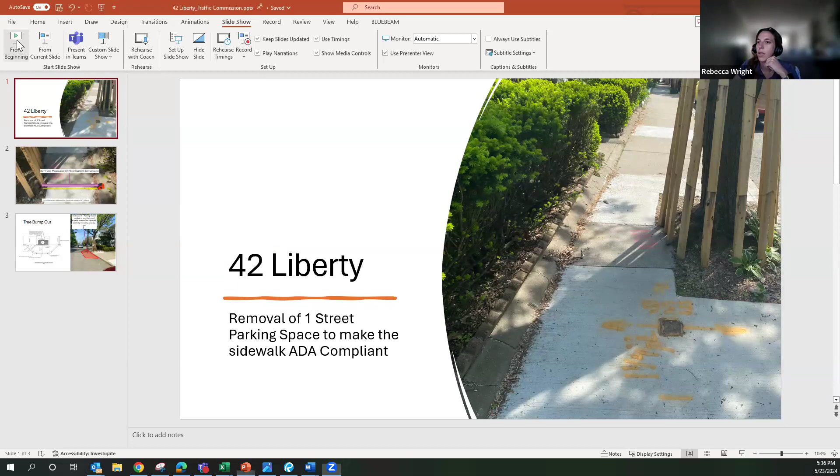Is it okay if I share my screen? I did put some slides together. Okay, can you guys see my presentation? All right, cool. I've never really done it on this, it's been a while.

So the area in question is 42 Liberty, removing one parking space to make the sidewalk ADA compliant. This is a field measurement. As you can see, it is 30 inches from the tree trunk to presumably the back of sidewalk property line. We need minimum 36 inches to make the sidewalk compliant for ADA.

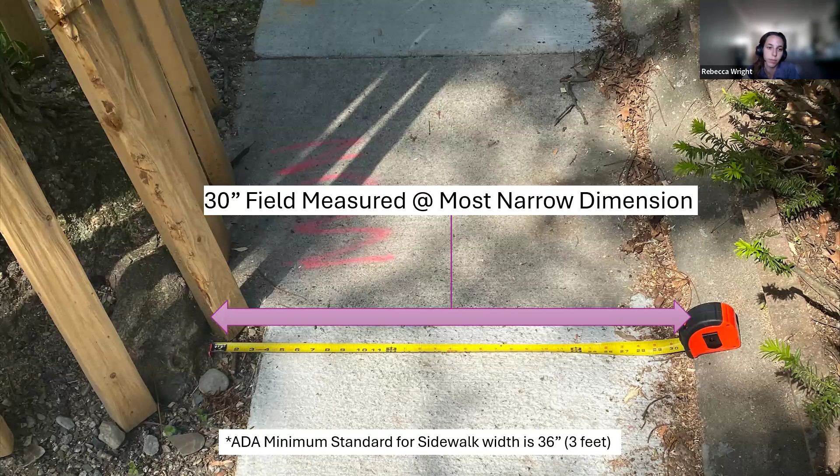And normally we replace flexi pave, but even with that, the trunk is way too high to get that extra 6 inches that we need. So the proposition is, in order to save the tree and make the area compliant, to install a sidewalk bump out. So it's new curbing and concrete, about 4 feet or 5.5 feet, which will take away 1 parking space to accommodate this request.

And that's the last of my slide. I'm not sure if anyone has any questions. I have a question. So if this gets approved and moves forward, just want to make sure that everyone's going to be on the same page about protecting the tree roots.

During construction. Yes. Yeah, so we are intentionally leaving the granite curbing in front of the actual tree in place and removing the adjacent curbing, which is normal construction procedure with this contract. So the curb directly in front of the tree pit will remain in place.

So it's very clear to the contractors that as they're working with this curb, leaving it in front, but working on the other side of the tree, that they'll be either hand digging that curb, correct? Yeah, we have air spading in this contract, and they will either do that or use their regular equipment and be careful around any roots.

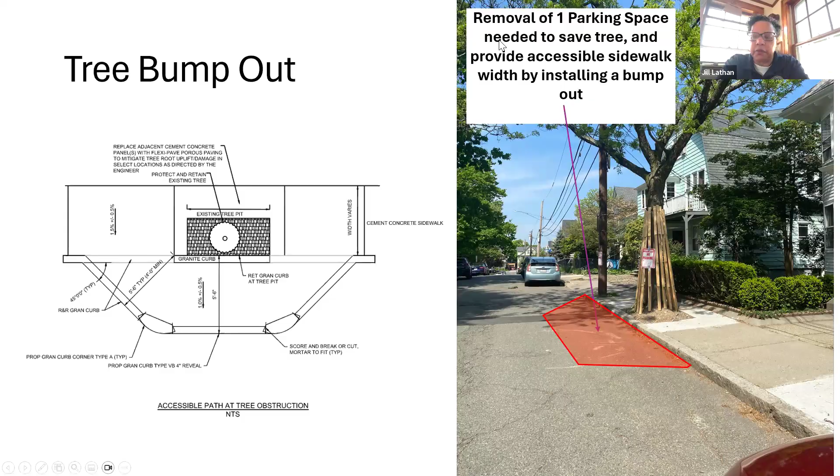Wonderful. On to item number 4. Regarding the curb on the north side of Somerville Ave from 115 feet to 150 feet west of Breach Street, nearest 577 Somerville Ave: request to convert 35 feet of 2-hour parking except by permit to a loading zone at all times.

Who is here to discuss this item? Good evening, Chair. My name is Adam Polinski from the city's mobility division, and I can represent this item. I will also share my screen if that's all right.

The location in question is 577 Somerville Ave. The current business tenant in that building, Vittoria Meat Market, came to the city and requested the creation of a loading zone to better suit their operations. This was reviewed in the field against other existing regulations in the area, against things like driveway locations, and how much room we had between mobility and parking.

We determined that this was a reasonable request, that the appropriate regulation was to take the 2-hour parking that's currently out there and make it a full-time loading zone, and proceed with taking the 35-foot section of curb here in front of this building as they requested, and changing the regulation.

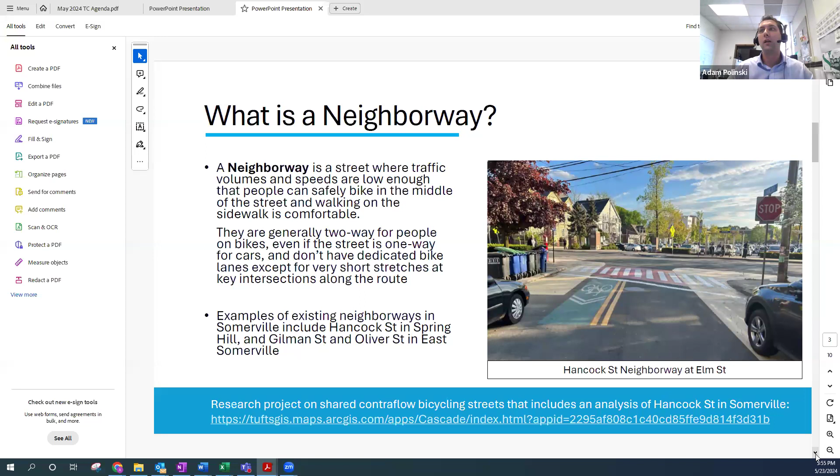So with that as the preamble, I'll get into the various items that we have discussed or that are on the agenda for today. So we will start over on Otis Street. This is Otis Street at McGrath Highway.

The item is for an additional 10 feet of no parking beyond our standard 20-foot parking regulation that already exists within 20 feet of all crosswalks or intersections within the city, extending that by an additional 10 feet of no parking so that we can produce the design as you see it on the right.

So this would be a similar treatment to what I was showing on Hancock, where you have a little entryway for a bike, a car has enough room to get around here, and once traffic has cleared, the bike can continue if there happens to be a car coming. If not, they can use this and take up the street. There will be opportunities throughout these streets for people to pull over, because we tend to have so many driveways in Somerville that there's a negotiation that happens. But in order to produce this important gateway treatment here, we are requesting the removal of 10 feet of residential permit parking.

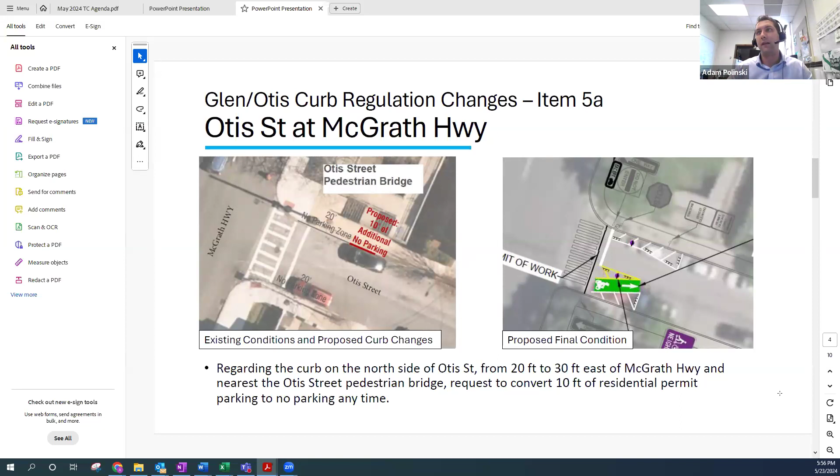It's going to be a similar story as we work our way down Otis. This is at Cross Street. The existing condition is shown here on the left. In addition to the standard 20-foot no parking zone that exists in our regulations citywide, we're requesting an additional 20 feet of no parking on the south side of Otis that is currently residential permit parking. Pending approval, this would be the final design in this section. Since Otis is one-way westbound, bikes would have a dedicated lane for about 40 feet coming into the intersection, and cars would be coming from Cross Street at all times.

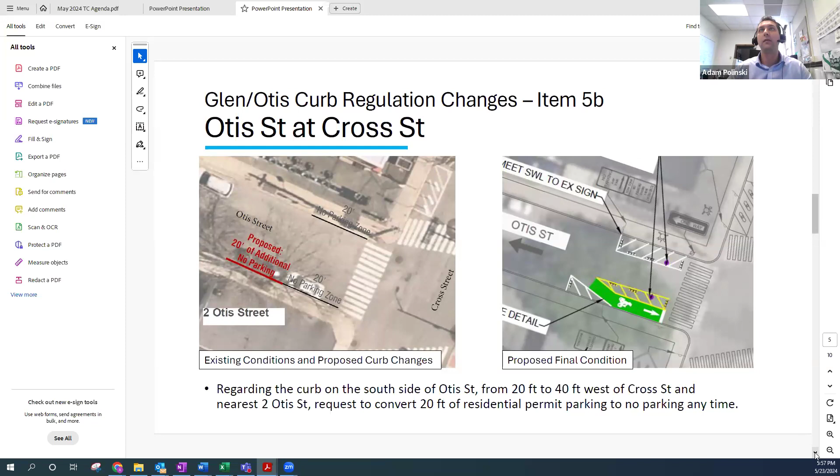We now move to Glen. This is Glen Street, going up and down on your screen, and that's Broadway going left to right at the top of the page.

The request here is for an additional... Can you just reference the letter when you're going to the next item, since they're labeled A, B? Yes, so we discussed A and B on Otis. We're now on item 5C. Would it be helpful for me to read out the full request, or just mention the name? No, just identify the item. 5C. Sounds good.

So 5C, this is at the top of Glen Street, the northernmost section of Glen. There is some metered parking here, so we would be requesting the removal of this meter to provide our exit treatment for someone contraflow coming out of Glen Street.

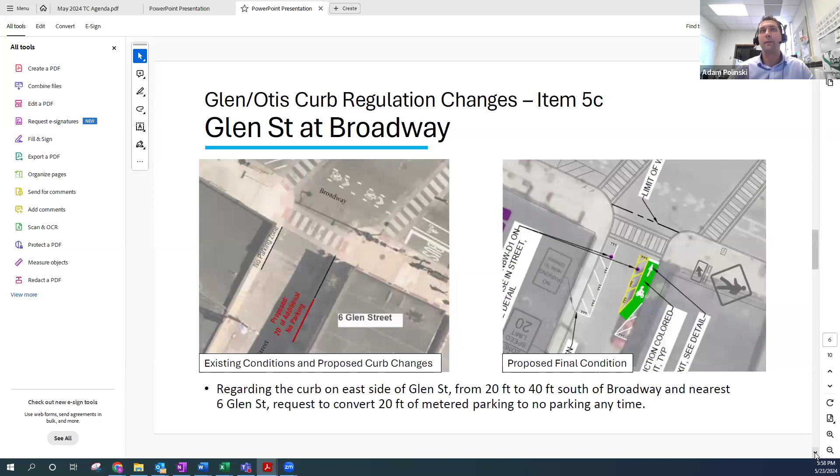Now we work all the way down to Pearl Street. The request here is, in addition to our 20-foot standard no parking zones, for 10 feet of no parking on the northeast corner of Glen here, and then an additional 10 feet on the northwest corner, and then the southeast corner on this side of Glen at Pearl. You can see the final design proposal here.

Those are items 5D and 5E, sorry.

Okay, moving on to 5F and 5G. Those both correspond to the Glen Street at Oliver Street intersection. The request is to take the existing residential permit parking on the northwest side of Glen, north of Oliver, to be able to provide the contraflow bike lane there. On the southeast side, this is 10 feet of what is currently a pickup and drop-off area during school hours, and residential permit parking at all other times. This does only amount to about half a space and is often used flexibly, so it's not really even a full parking space in that case. The idea is that we will then be able to provide some additional space for the treatments on Glen at Oliver.

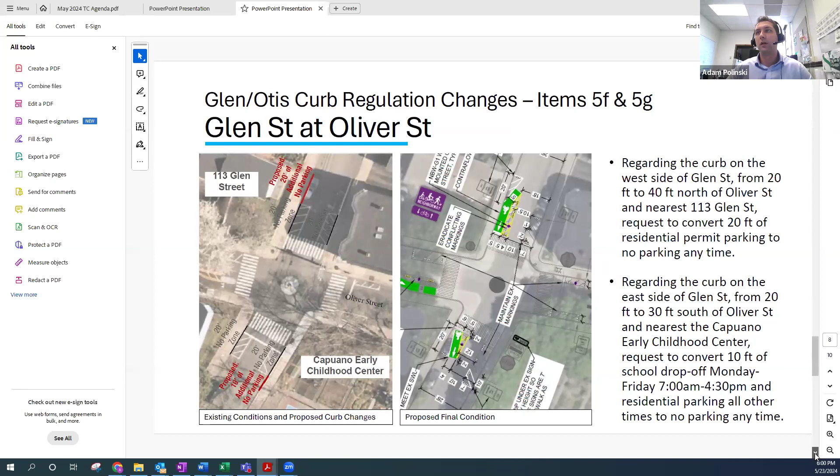And then the last curb regulation, item 5H, is at Glen and Tufts, all the way at the southern end of Glen. That request is for an additional 20 feet of no parking on top of the standard 20-foot no parking zone, so that we can produce a bike exit lane onto Tufts Street.

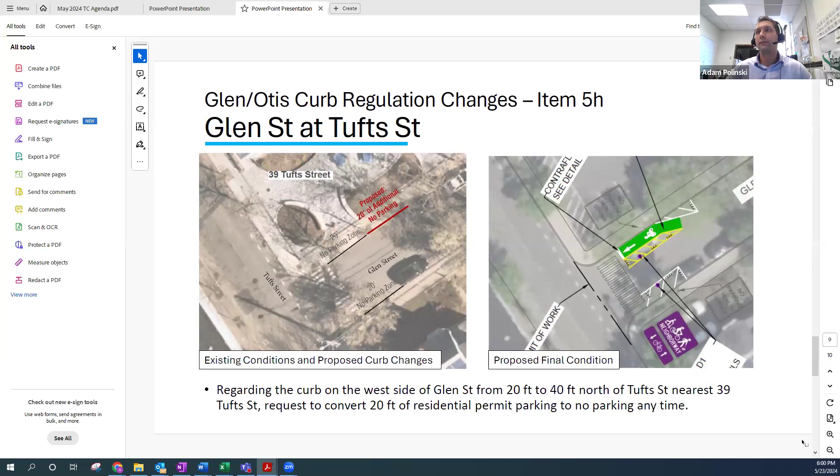And then lastly, we are also requesting not just the curb regulation changes, but the traffic regulation changes to accommodate these contraflow biking facilities. Item 5I is the request to allow two-way travel for people riding bicycles on Glen Street between Tufts Street and Broadway. Item 5J is the request to allow two-way travel for people riding bicycles on Otis Street between McGrath Highway and Cross Street. So that is my presentation on the Glen Street and Otis Street project and our subsequent curb and traffic regulation changes, and I can take any questions if there are any at this time.

Questions from the committee, discussion?

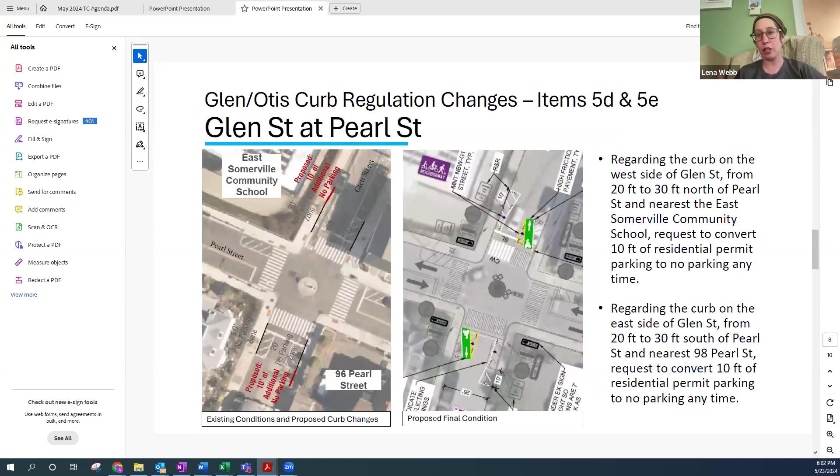One thing I don't like about contraflow bike lanes, and I wonder if it can be addressed here, is that there isn't some sort of sign or reminder in the middle of the street that this is a contraflow bike lane. What we have right now is a clear entry and a clear exit, but in the middle, when a car is coming down, there's no real sign of it.

So is that a purple super sharrow? The design we've chosen is a little different than a standard sharrow. It's intended to be a woman on a bike, with a purple background to highlight something different than the standard sharrow.

It would be two-way, just to indicate that this is a different kind of street. It will have signs as well, and if we felt more signage was necessary, we could always add more in the middle. There isn't a ton planned now because we're cognizant of sign clutter, but we think pavement markings every couple hundred feet would get the message across.

There will be one every certain amount of feet, so by the time you get to one marking, you should be able to see the next one up the street.

Any further discussion? Can I get a motion to accept or deny item number 5, A, B, C, D, E, F, G, H, I, and J?

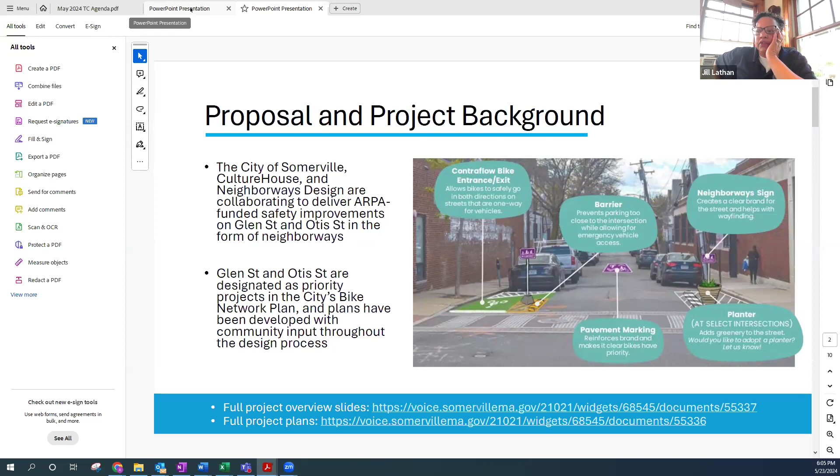The genesis of this request was from United Divers. Since the implementation of a bus lane in the eastbound direction of Washington Street, there has been some parking removal on that corridor. We were talking to the owner, my colleague Justin, a couple weeks ago, and they were requesting changes on Florence to better accommodate some of their customers' needs. Right now it's mostly residential in this area, except on a couple of short stretches of Washington Street, so they were asking if accommodations could be made to better serve their customer base.

This project was rolled out a few years ago, but these days, as you're all pretty aware, when we make more substantial changes, especially regarding parking on some of our main corridors, we also look at the side streets. So we felt that it was a reasonable request from this business owner.